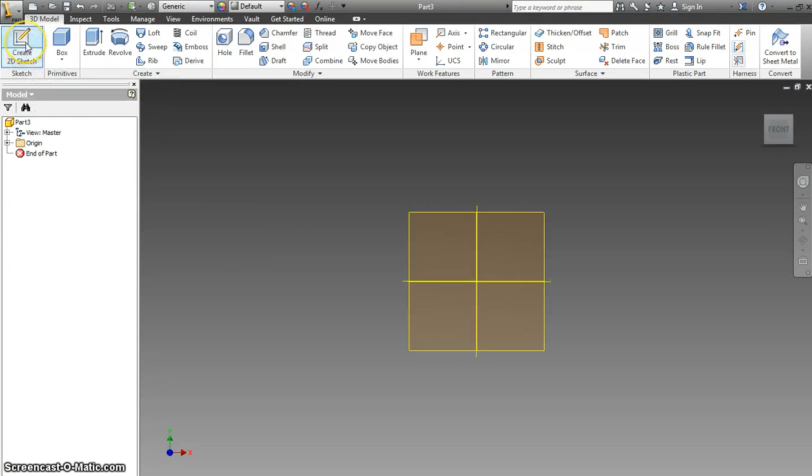I'm going to create a sketch on my XY plane, and then make a rectangle. So I'll come up here and draw the rectangle. I can edit the size then.

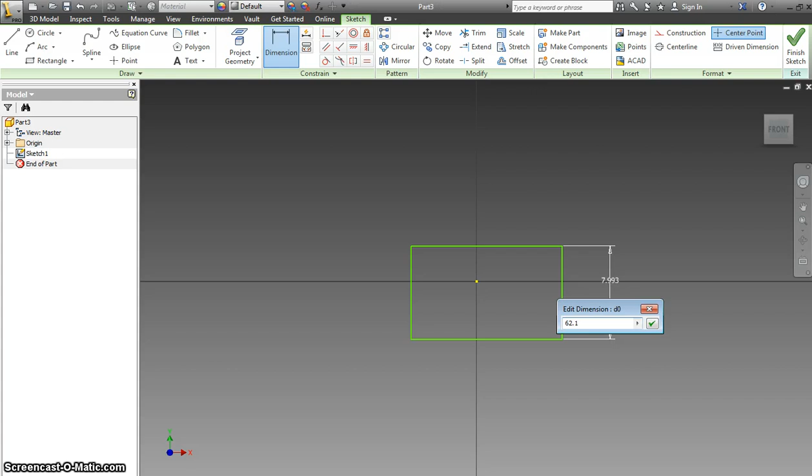I do dimension, pull it out. Alright, this dimension is going to be 62.1 millimeters. It didn't disappear, it just made it much bigger.

So I have to zoom out here, do another dimension. And this one is going to be 115.55 millimeters. Gotta place it first.

Alright, now to make it easier, I'm going to center it on my origin, basically this point here. To do that, I can just pull another dimension.

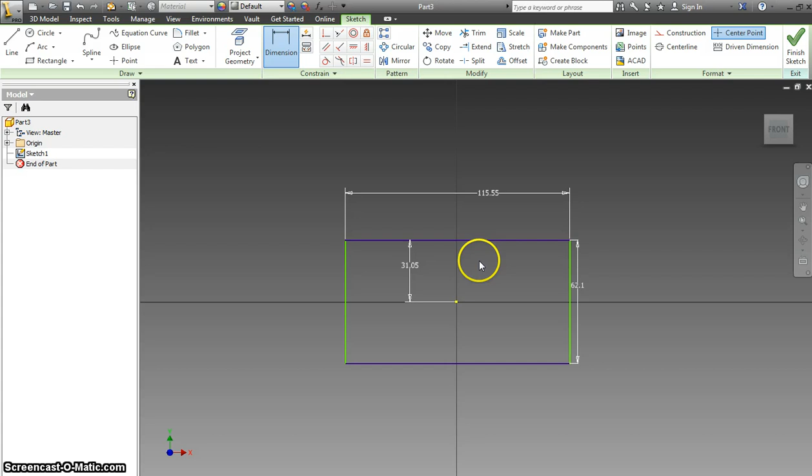Pull it out. 62.1 divided by 2. If I pull one going the opposite way, 115.55 divided by 2.

Alright, that will center up for me. I can finish my sketch. Zoom out so I can see it again.

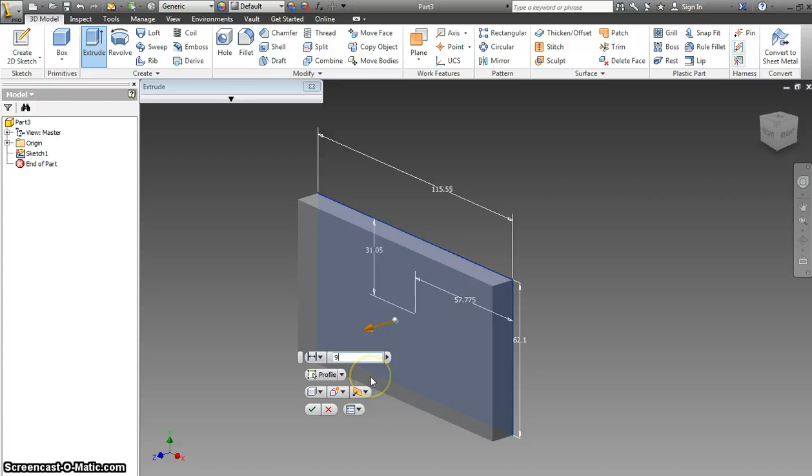I'm going to extrude. Alright, the thickness on this one is going to be 9 millimeters. I'm going to extrude it away from me. It doesn't really matter, we're going to be adding to it anyway.

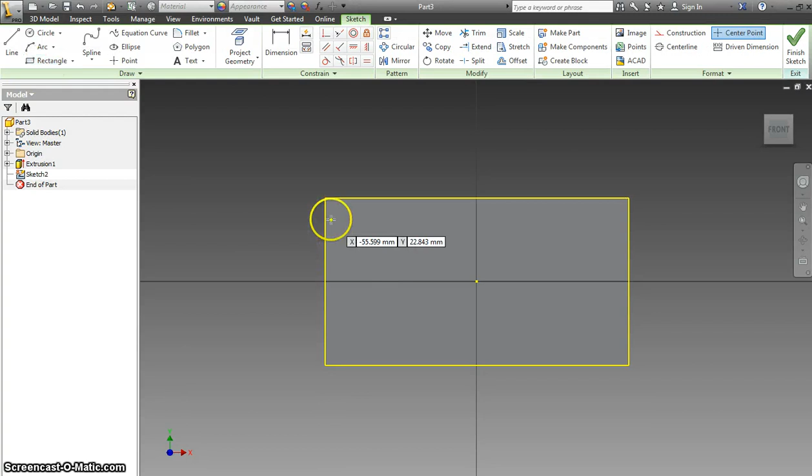I'll check the box. Now I'm going to make another extrusion, another part that is exactly the same size, just a little bit thinner. So I'm going to do a 2D sketch. I can just click on the face. I'll do rectangle, one corner, opposite corner.

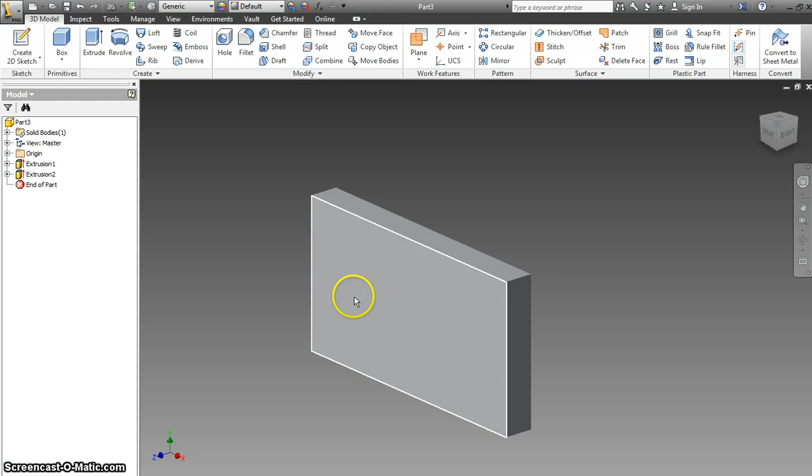Finish sketch, extrude. Now this one's going to be 3.3. And I want to make sure I'm extruding out from the original. I don't want to extrude back into it because that'll actually end up cutting it. Click OK. Now I have the basic box outline shape.

Now I'm going to round the corners using fillet. The fillet size I'm going to use is 6 millimeters, and then I just go around and click on all 4 corners. Select it and I'm good.

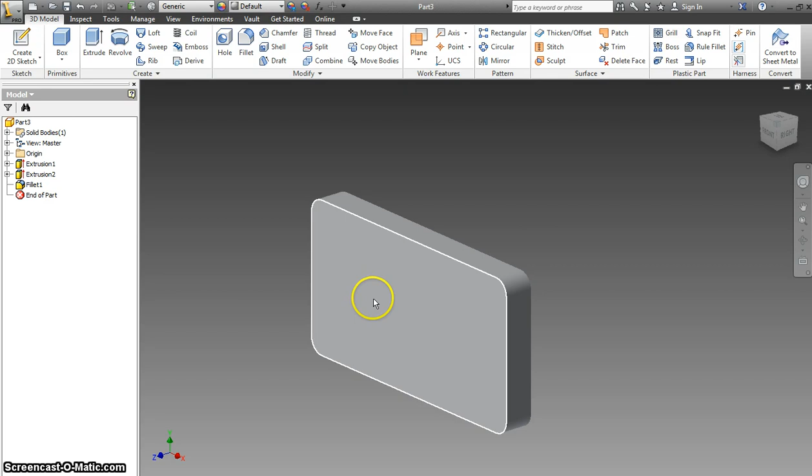Now I'm going to add a fillet to the top edge, the face closest to me, the thinner part that's 3.3. Alright, this radius is going to be 4.3. All I'm going to do is select this top edge and we'll do the entire thing all at once.

Now I'm going to do the back side. It's freezing on me a little bit there. Alright, the back side is going to be a different size fillet, this one is going to be 8 millimeters. Select it, you should see it rounds it a little bit more.

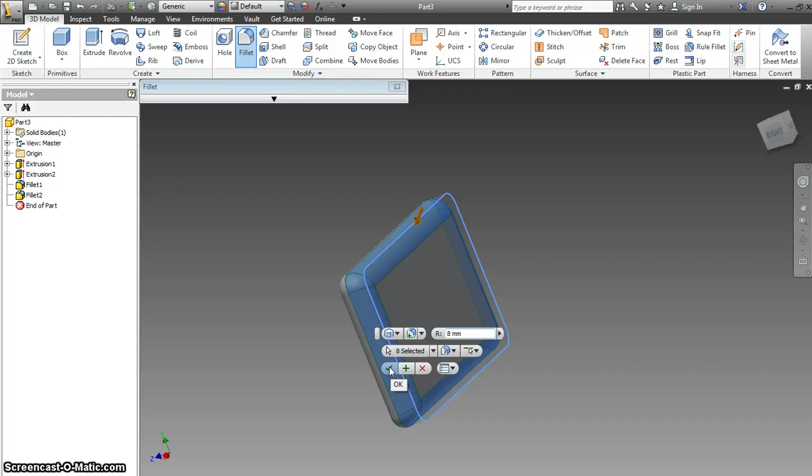Alright, so I have the basic shape in. Now, what you can do, let me check it, it's lagging a little bit.

We can change the properties of what these parts actually look like. For the back here, I'll just change that. If I right click and go down here to properties, I'm going to make the back polished chrome. Select OK.

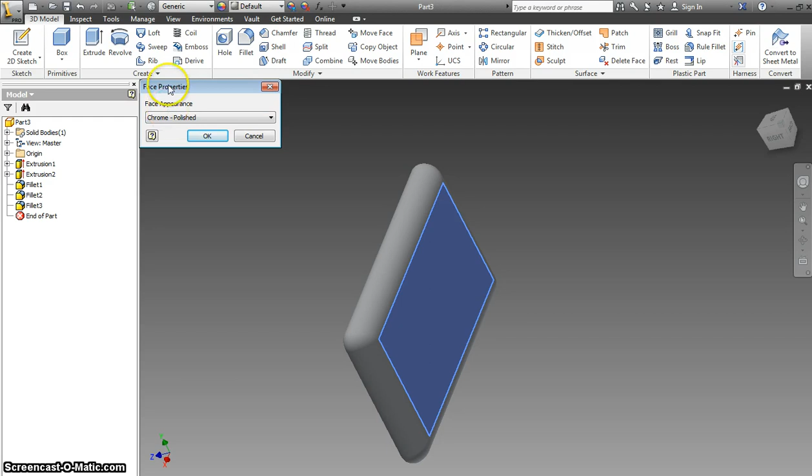As I move it around, it gives it the appearance of a polished chrome face. Let me come back here to the front.

Alright, on the front face, the side with the smaller radius, I'm going to add the next part. I'm going to select that face to draw my sketch on. What I'm going to do is offset this outside border.

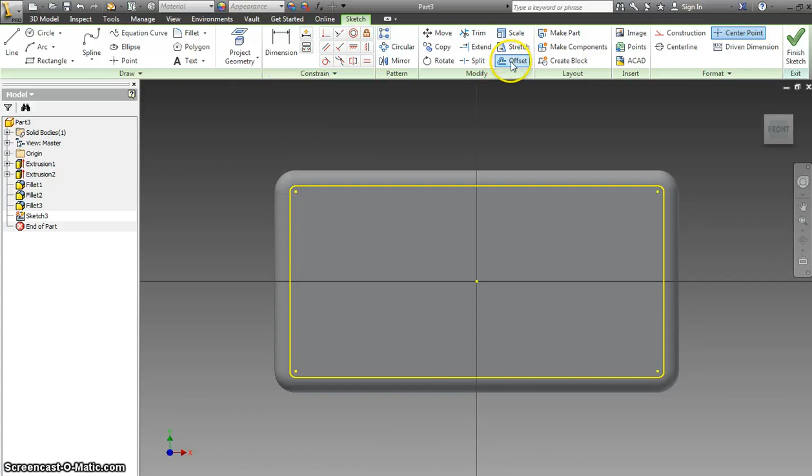I'm going to pull it in. Let me zoom in a little bit. The distance in doesn't really matter. It will only let me go so far.

I'm going to place it, and then what I can do is add a dimension. Zoom in here to here, pull it out to the side. And then that distance is going to be 1.065, and that's the offset distance I will need.

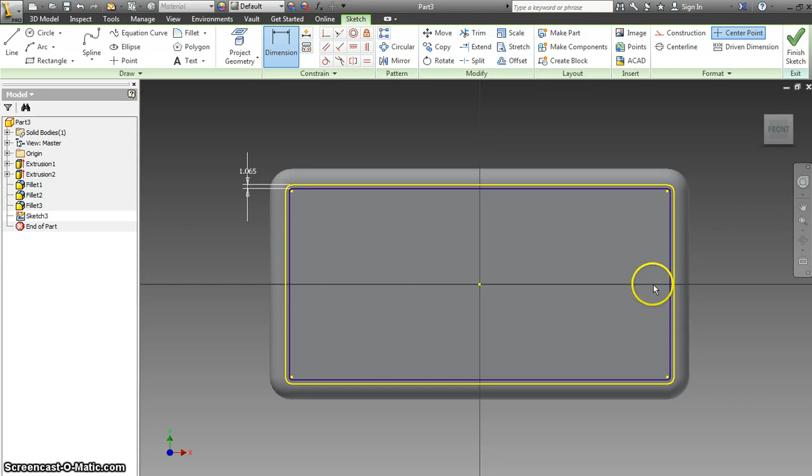So right now I'm making the screen. Now I'm going to make the home button here. So I'll come - you can use a line to draw the distance up.

I'll just do a circle so it's a little bit different. I want it centered top to bottom or left to right, depending which way your phone's orientated. Alright, the size of the circle is going to be 8.135.

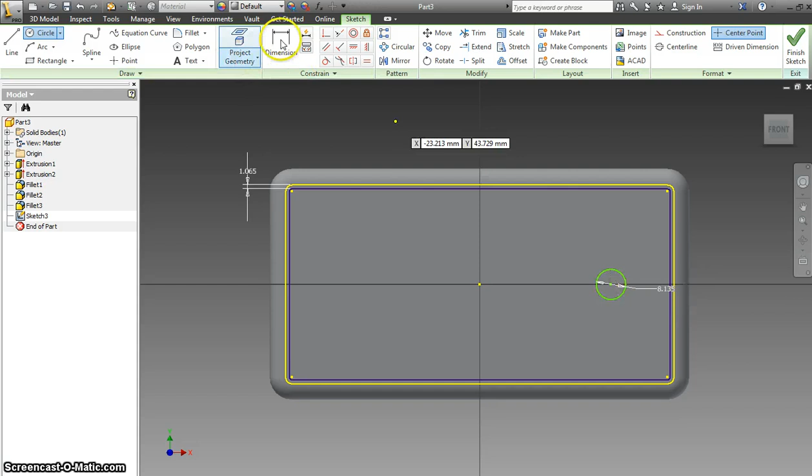That makes a circle. And if I dimension point to offset line and place it, that distance should be 9.68. Enter that.

Now that the basic shape is done, if you drew a line—the 9.68—to make the circle, make sure you delete that line. I'm going to do finish sketch.

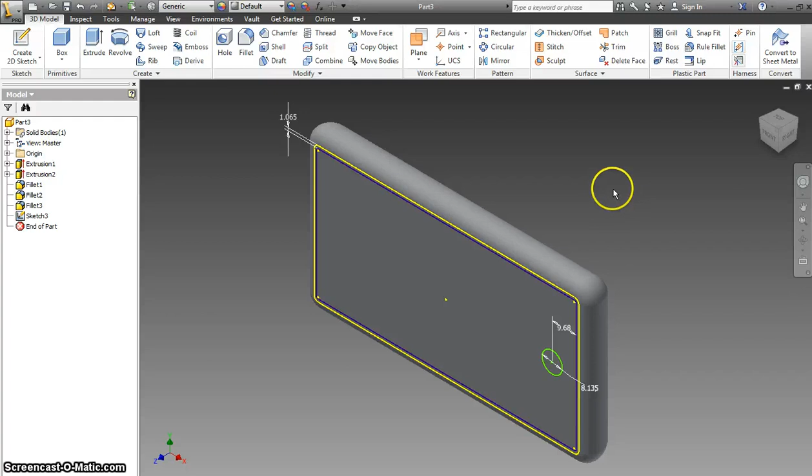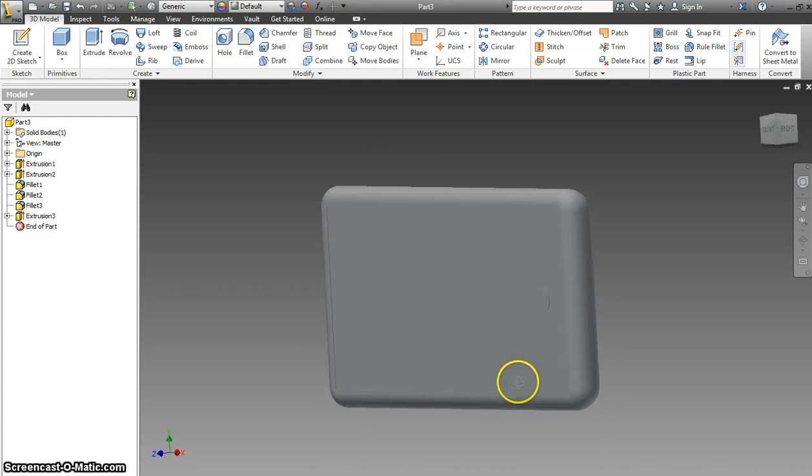Now I'm going to cut or extrude this face. The distance is going to be 0.2. I want to go in and cut—when I change the direction, it'll automatically change the cut for me. Select OK. If I move it a little bit, you can kind of see the very edge of the button.

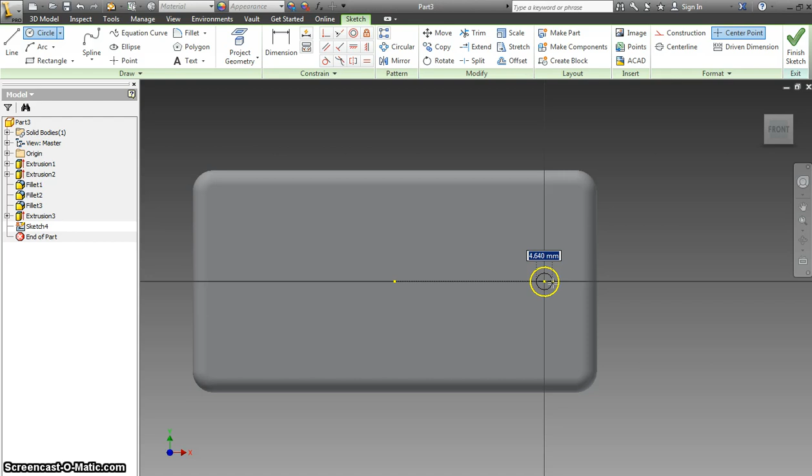The button's raised up. Now I'm going to add a feature to the button. If it's an iPhone, this would kind of be your home button here. I'm going to select a circle with the same center point as that one. This circle is going to be a diameter of 4.

Now I'm going to extrude cut, so I'll finish my sketch. Extrude, select the inside circle. The distance is going to be 0.44, and again I'm going to change it so that it cuts in. Select OK.

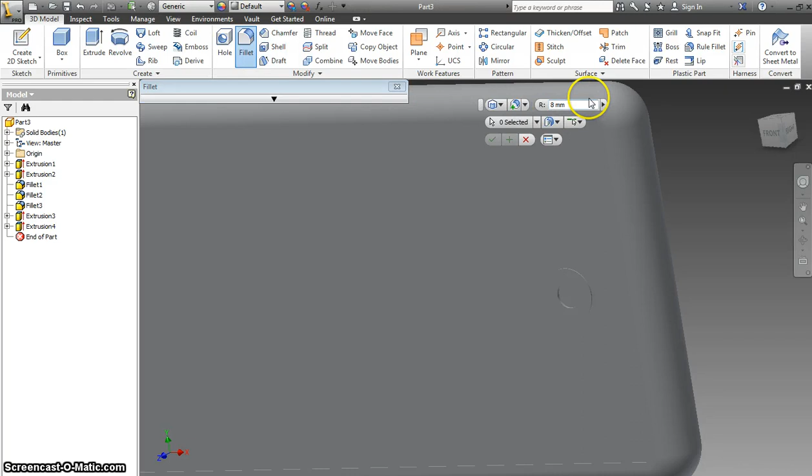Now, iPhones, new ones and old ones, the buttons don't really have sharp edges, so I'm going to add a fillet to it just to smooth it out. I'm going to put the fillet as 2 millimeters and select the inside top edge. You can kind of see where it's going to make a little dimple radius down to the part that I just cut.

Again, if you're having problems seeing these, you can always change the material that they're made out of. I'm going to leave it where it is now because I'm going to change those in a second.

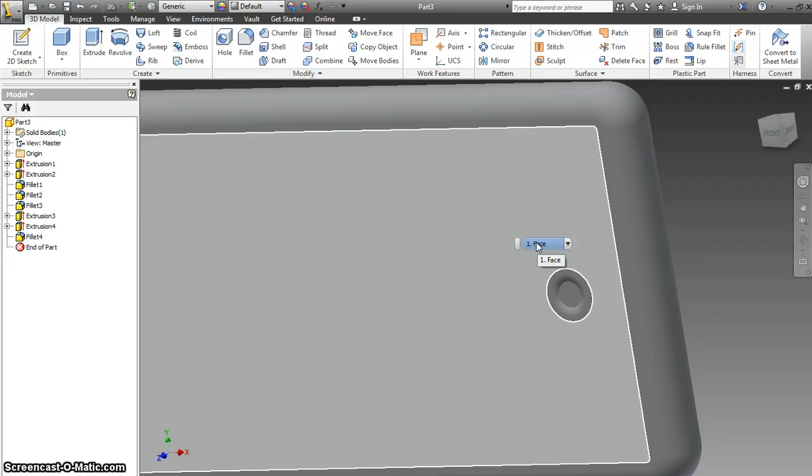Alright, now I'm going to make the actual screen. I'm going to start another sketch, select my face here. Let me zoom out a little bit. Alright, I'm going to make a rectangle.

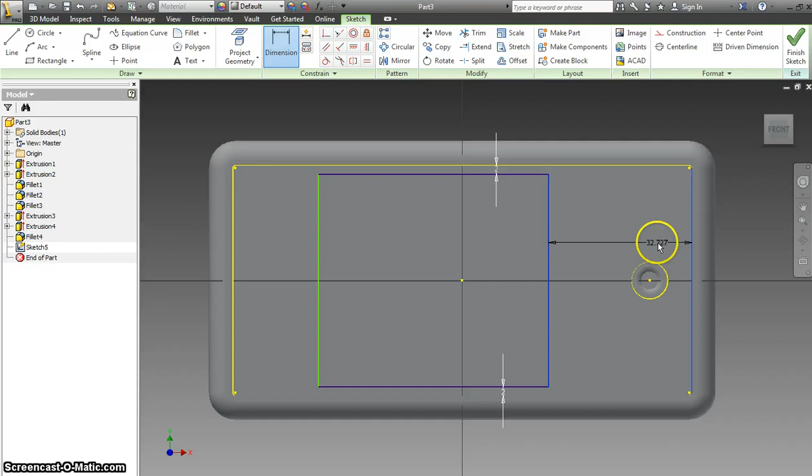I'm not worrying about the size of it yet—I'm going to reference the edges to get the size of this rectangle. So I'll do a dimension here to here; this distance is going to be 2 millimeters. I'll do the same thing on the other side, placing it 2 millimeters. The bottom is going to be 18 millimeters, and then the top is going to be 8 millimeters.

Alright, now I'm not done. If you want to actually hear anything out of the phone, we're going to cut a little indent hole here for the speaker.

Alright, I'm going to do the same basic thing—cut and make a rectangle. I'll add a dimension to get the size of it right first. This one is going to be 10 tall and 1 wide.

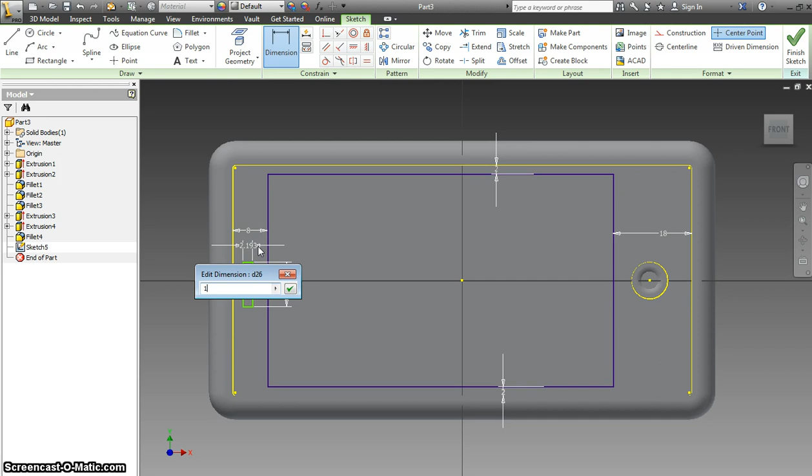The distance in from the outside edge—let me zoom in so it's a little easier to see—here to here is going to be 4 millimeters. Now I also want to center it top to bottom, so what I'm going to do is take this edge, but it won't let me select the midpoint here.

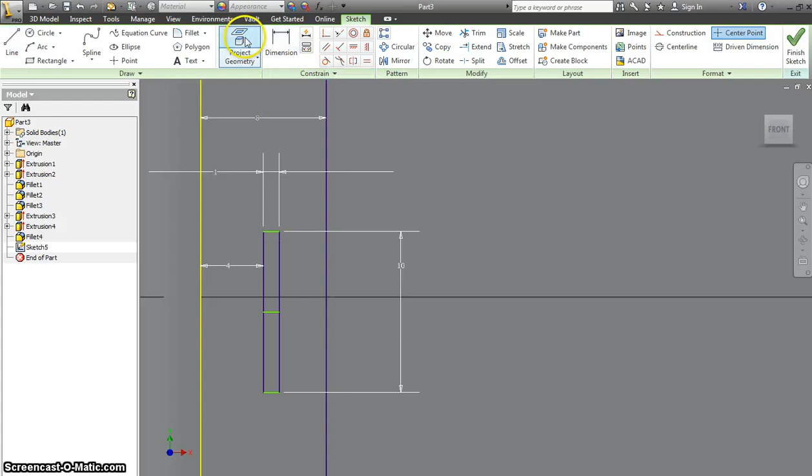So let me just draw a temporary line here at my midpoint. Hold on, I remember what I did wrong here. Alright, I want to come from this midpoint out. There we go—dimension from here to here, and pull it out.

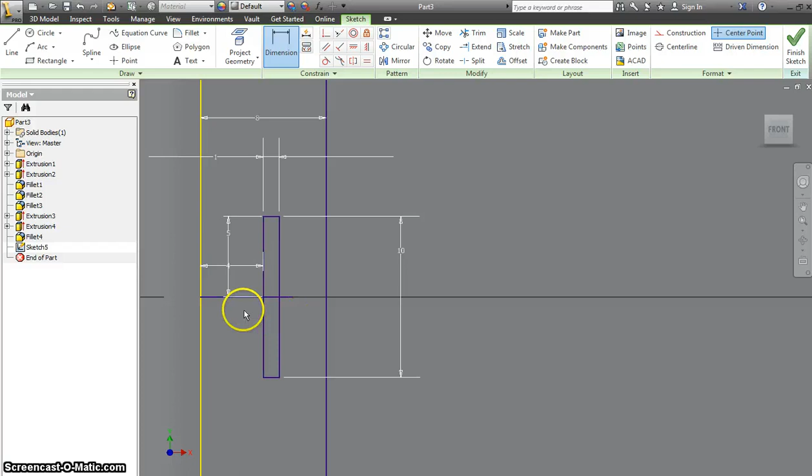The whole thing's 10; if I want to center it, it should be 5. You just want to make sure you get rid of this line here so that you don't have any extra lines that tend to mess with your extrusion.

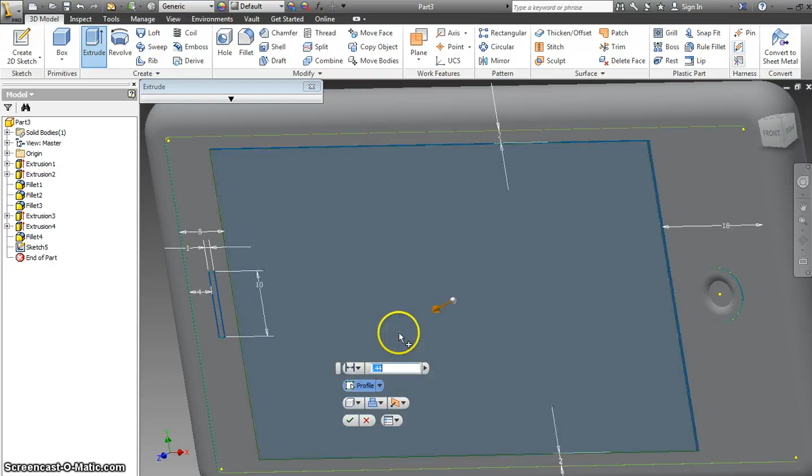Now I'm going to finish my sketch and extrude. Let me zoom this way a little bit. Alright, the faces I'm going to select—I'm going to select this part, which would be the screen, and I'm going to select this inside, which would be the speaker hole.

The size is going to be 0.2 millimeters, and I want to cut it down. Again, make sure it changed to cut. Click OK—then I have the basic shape here.

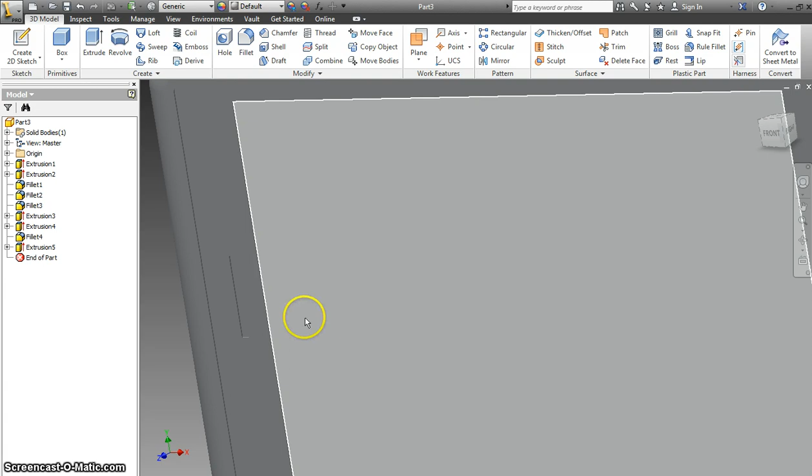Now, the rest is all just cosmetics. Once you have this basic shape, the phone body or dummy is pretty much done. I'll come in here, go to properties, and change my screen to some sort of glass, something shiny.

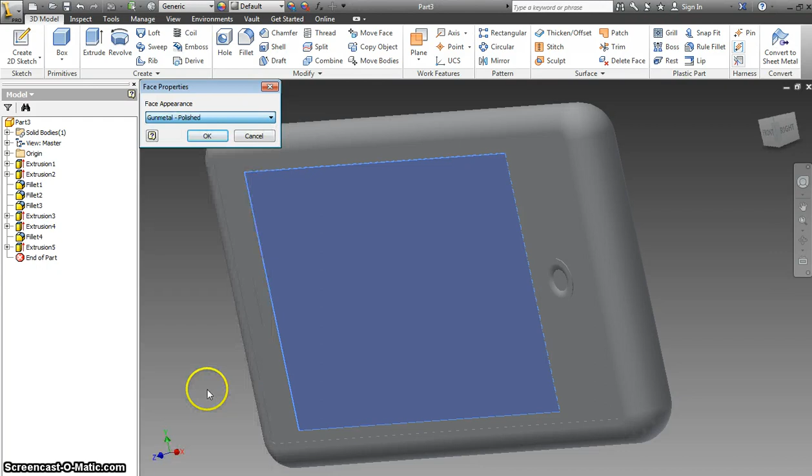It'll actually change the texture of it too, so I'll just do gunmetal polished. Select OK.

I'll make the face around it—I'll do copper polished. Again, even with the light source, as it moves around, you'll be able to see it reflecting, kind of changing the way it's looking. You can go through and edit all the faces you want to; you don't necessarily have to edit all of them.

Alright, we're just using this as one part of an assembly to create.